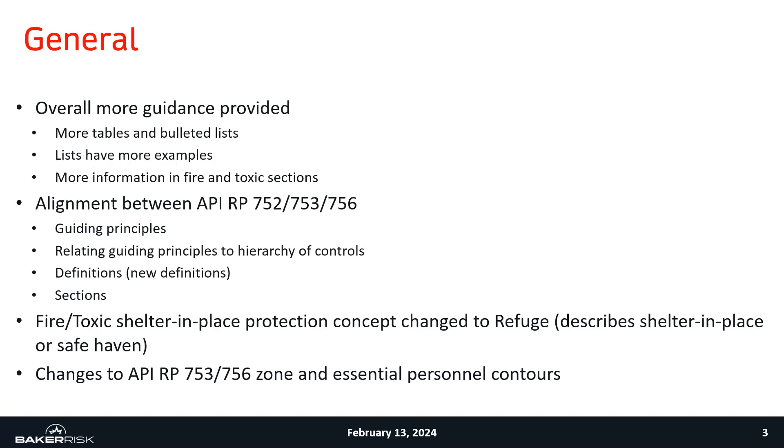API RP 752 covers new and existing permanent buildings, same as before. It also covers new and existing portable buildings, other than light wood trailers, intended for perpetual use in a specific fixed location. Previously, API RP 752 covered portable buildings specifically designed to resist significant blast loads and intended for permanent use in a fixed location.

This is a change and an expansion from just buildings designed to resist significant blast loads, intended for permanent use in a fixed location, to basically any portable building other than light wood trailers intended for perpetual use in a specific fixed location. API RP 753 covers all portable buildings intended to be movable and all light wood trailers.

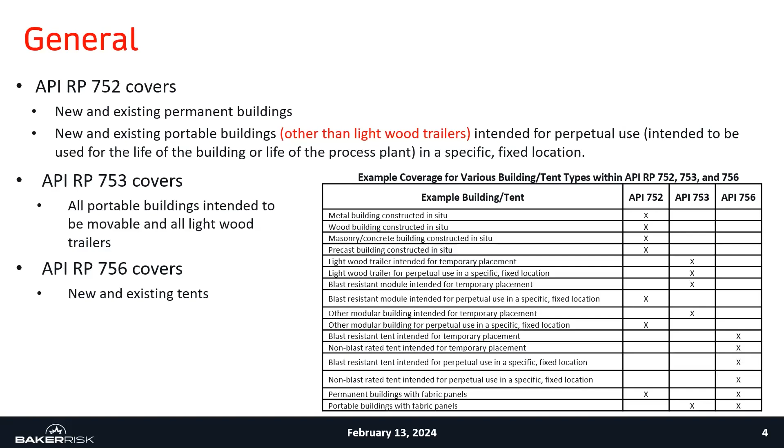Now looking at the determination of buildings and tents requiring siting evaluation section, the previous version of API RP 753 was released in 2007. At that time, guidance was provided on portable buildings intended for occupancy, portable buildings not intended for occupancy, and other occupied portable structures.

Subsequent versions of API RP 752 and 756 revised these categories into four main categories you see here: intended for occupancy, not intended for occupancy, excluded structures, and evaluated for exclusions. They also added more examples of buildings and tents under each of these categories.

This slide actually shows portable buildings that were not specifically listed in the previous version of API RP 753, but are now listed in alignment with API RP 752 and 756.

For buildings and tents that are excluded from the siting evaluation, the RP now states that owners and operators should consider the factors listed in the explosion, fire, and toxic additional consideration sections, which is somewhat new to the RPs. Some of them had additional consideration sections, but some did not.

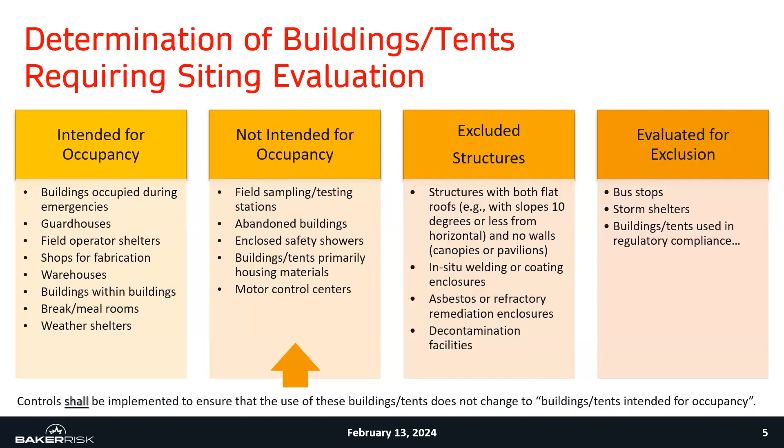Moving on to the siting evaluation process and criteria sections, there is an updated building site evaluation process flowchart in API RP 752, and the additions are shown in the shaded color here, which are really around ensuring that the buildings are placed in accordance with the guiding principles, documenting the siting evaluation, and revalidating the siting evaluation periodically.

Previously, the siting evaluation process criteria included things like blast load, thermal flux and exposure time, building damage, occupant vulnerability, etc. But instead of internal environment quality, shown here, this was previously called building internal environment degradation. And now there's additional description on what this actually means.

What does internal environment quality mean? It's things like oxygen, carbon monoxide, carbon dioxide levels, air temperature, humidity, temperature of building surfaces, and smoke and/or other combustion products. These criteria on internal environment quality are really important for buildings with a toxic or fire refuge protection concept. They're really not that important if the protection concept is for immediate evacuation.

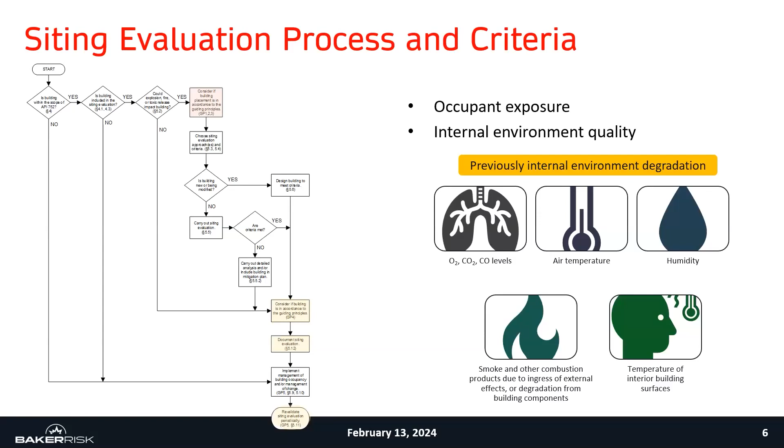And these criteria, and identical criteria, have now been added to API RP 753 and 756.

Moving on to the siting evaluation process, a little more detail in 753 and 756. There was not previously a flowchart present in API 753, but one was present in API RP 756, and it has been slightly updated. The flowcharts in API RP 753 and 756 are identical, except for the terminology of portable buildings and tents.

There are several new shall statements in the siting evaluation process section, which were not previously present in API RP 753. Owners and operators shall determine and document occupancy restrictions for each building intended for occupancy. Occupancy restrictions means whether the tent or portable building is limited to essential personnel only, or it can contain non-essential personnel. Then determine if the portable building or tent intended for occupancy could be impacted by an explosion, flammable vapor release, thermal radiation, or toxic material release. For each of these hazard types that could impact the building or tent, a siting evaluation of the hazard shall be conducted and documented.

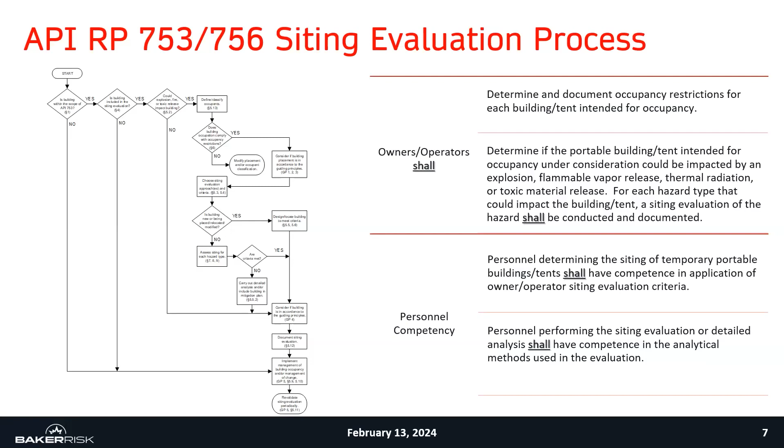According to their tolerance criteria. So a couple more points and changes around the siting evaluation process and criteria. One is that the siting evaluation method does not affect the determination of the occupancy restrictions or zoning restrictions. So whether you're performing a consequence or risk-based approach does not affect the essential, non-essential, or zone 1, 2, 3 boundaries.

Those are independent. Also, if performing a risk-based approach for a portable building intended for occupancy to establish the individual risk, the study shall assume the portable building or tent to be occupied at least 40 hours a week by an individual for the entire year, and no credit shall be taken for cases where the portable building or tent will not be used or located at the site for less than a year. That 40 hours a week requirement was previously present in API RP 753, but was not in API RP 756. So really this is focused on, for example, if you have a maximum individual risk tolerance criteria, that maximum exposure cannot be less than 40 hours a week for any portable building or tent. That's the minimum. You cannot credit that the portable building or tent will only be on site for, say, a month or a couple months of the year in your individual risk calculation.

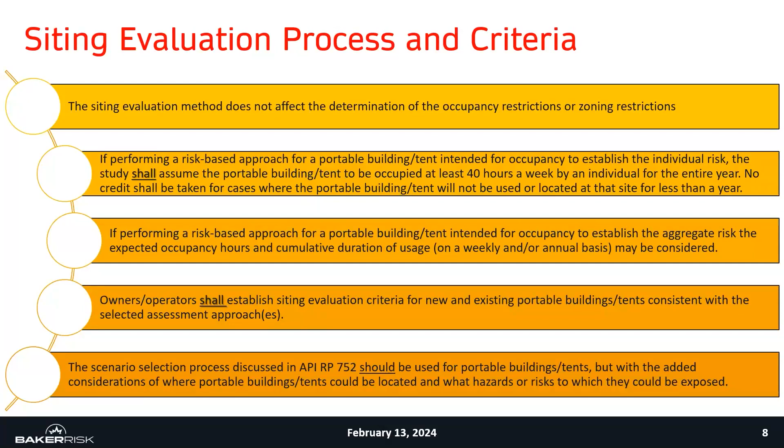Moving on to the MOC and revalidation sections. The MOC section was previously present in API RP 752 and 756, but was not in API RP 753. And in API RP 752, there is one update and two additional situations that may require an MOC evaluation. The first bullet here is about the update, which just the update is especially during periods of increased risk, including but not limited to unit startup, testing, or planned shutdown operations. So that addition there at the end is an update.

And then the new situations that have been added are the building status changes from temporary to permanent, which actually changes which RP the building is addressed in, and then adding an unoccupied building or structure that could cause a change in the potential for or severity of explosion, fire, or toxic material release impacts. That's focused on clarifying that unoccupied buildings or structures recognizes the fact that these may pose additional congestion and confinement on site or actually contain a hazard, even though they're unoccupied.

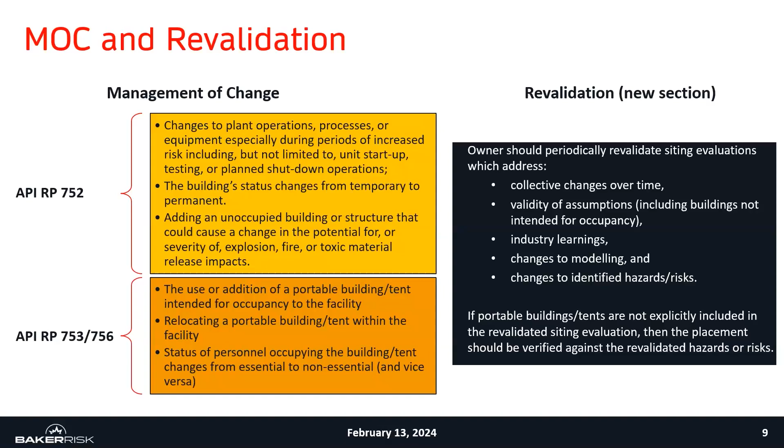Looking at changes to the essential and non-essential personnel sections of API RP 753 and 756. This is a new section on non-essential personnel and portable buildings or tents, and on siting restrictions for non-essential personnel. Now, API RP 753 did previously have a section on essential personnel and the use of portable buildings, but API RP 756 did not.

It states that owners and/or operators shall determine whether the personnel intended to occupy a portable building or tent meet the definition of essential personnel for each applicable phase of plant operation, such as normal operation, startup, and plant shutdown. It does also state that some personnel may be essential during one phase of operation and non-essential during another, and also that it's not dependent on whether the personnel work on site on a permanent or temporary basis. So again, just because you're essential for one phase of operation does not make you essential for every phase of operation. And if you're permanent, that does not mean you're essential necessarily. And whether you're temporary or there for a turnaround does not necessarily make you non-essential.

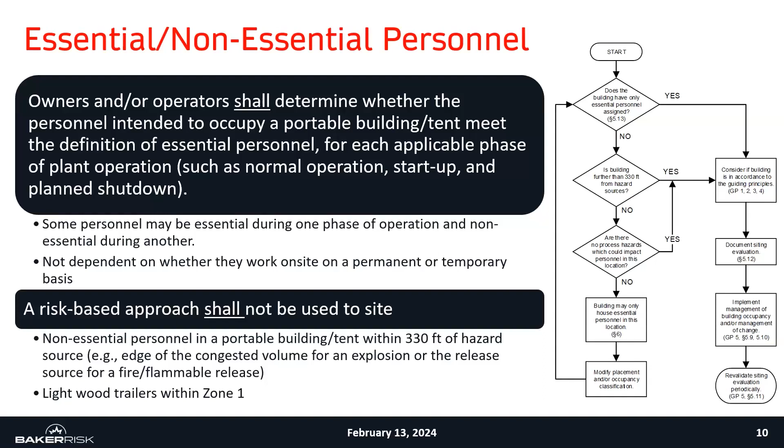There is also a new flowchart for occupancy restrictions in portable buildings and tents, shown here on the right. And there is also an explanation on why portable buildings and tents have a distinction in siting of essential versus non-essential personnel, and permanent buildings do not. That's an additional sentence or paragraph added to the RPs.

So a little more information on the essential and non-essential personnel sections.

It states that non-essential personnel shall not occupy portable buildings and tents within 330 feet of potential explosion or fire sources, which could impact personnel in a building or tent at that location, regardless of building and tent design, and located in Zone 1 for VCE. The previous RPs stated that non-essential personnel could not be located in Zone 1, so that's still the same requirement. The new requirement is that non-essential personnel cannot be located within 330 feet of an explosion or fire source that can impact personnel in a building.

For explosion sources, this would be things like bursting pressure vessels, TNT scenarios, furnace firebox scenarios, things of that nature.

This addition recognizes that standoff from external VCEs is not the only hazard that could impact personnel in portable buildings and tents, and considering other explosion hazards, as well as flash fire and jet and pool fires, is also important. It also means that the location of essential and non-essential personnel is not coupled solely to the explosion zone boundary. So this addition could change where essential and non-essential personnel can be located on your site.

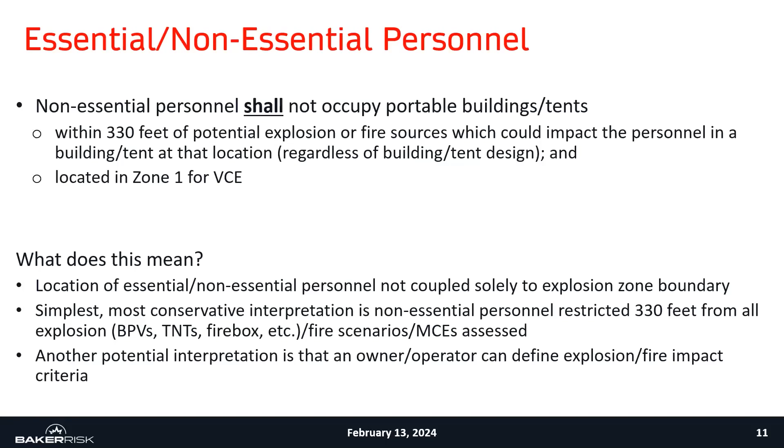Moving on to the explosion section, there is an updated siting evaluation for explosion process flowchart. Additions are shown in the shaded colors, pretty much the same type of additions as with the other flowcharts.

There is a previous section on factors influencing the potential for VCEs, and now it mentions that non-process congestion and confinement can also influence the severity of a VCE, providing examples including rail cars and vehicles, dense vegetation, spaces beneath elevated structures and substations, and buildings that allow ingress. So it's clearly recognized in the new RPs that non-process congestion and confinement can affect vapor cloud explosions and should be included in facility siting evaluations. API RP 753 and 756 specifically include non-process congestion and confinement in their definitions for zone boundaries as well.

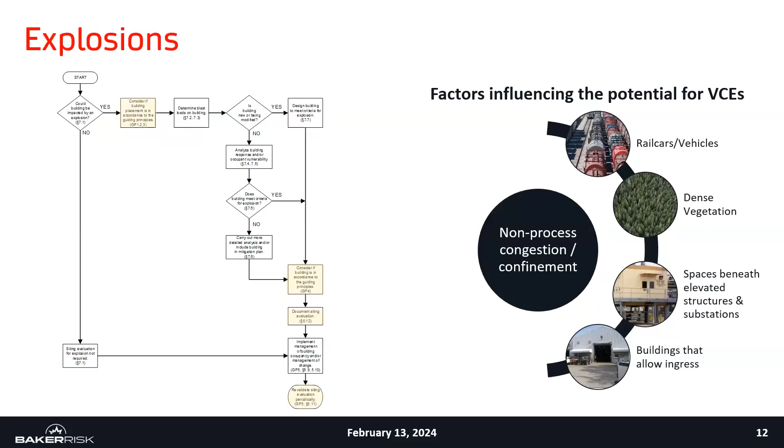In the explosion building assessment section, there are also a couple of changes. The previous version of API RP 752 mentioned types of debris hazards associated with explosion occupant vulnerability, and the revised version provides a bulleted list including 3 additional debris hazards shown in red here: thrown doors or windows, mechanical equipment, and fragments from shattered windows.

There's also a new section which allows explosion testing in lieu of, or in support of, detailed structural analysis to establish the response of a building or its components to blast loading. This was previously present in API RP 756 for tents, but was not previously shown in API RP 752 or 753.

There was also a previous paragraph in API RP 752 discussing buildings of brittle construction specifically. Now another section has been added on buildings constructed by the assembly of self-framing panels, stating that they could have inferior performance under blast loading compared to lightweight trailers, described in API RP 753. The evaluation of buildings constructed of self-framing panels is best based on static or dynamic testing, or detailed structural analysis of the specific panels and connections.

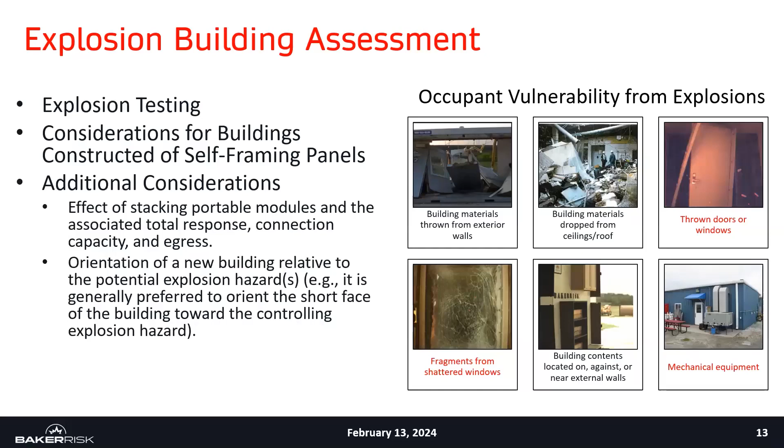So I've added a video here to give you a brief break from hearing me talk and to highlight a couple things. One, this is an example of building explosion testing, and two, it highlights potential vulnerability or lack of vulnerability from non-structural debris hazards, specifically around building contents located on, against, or near external walls in different structures and their associated building response level.

And these buildings are subject to the same blast load, of course, applied to the buildings, and all the structure and the internal equipment is the same. It's just kind of reversed, but it's the same connection, same internal equipment inside the buildings.

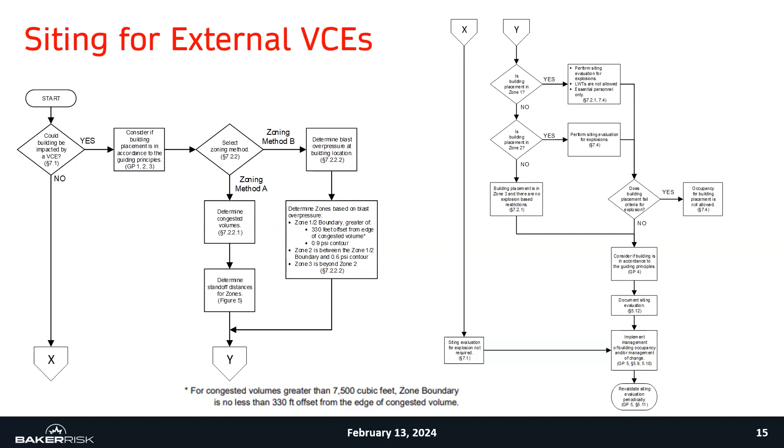To show a little more detail about these zoning methods, method A applies to external VCEs only, and it applies to congested volumes less than 1 million cubic feet. And the zone boundary figure shown at the bottom here is very much the same between the simplified method previously and method A; it has not really changed.

The main clarifications here are that method A limits the zone 1 boundary to a minimum of 330 feet, regardless of the size of the congested volume. That's why it says at the bottom there, 0 to 7,500 cubic feet. So again, minimum of 330 feet from congested volumes, and that's from both process and non-process area congested volumes.

The previous RPs did not specifically discuss non-process area congestion, so this is an addition. Potentially, if you could show that flammables can't reach some of this non-process area congestion, then that could be omitted from these zone boundary contours.

Another clarification is that method A cannot be used for congested volumes over 1 million cubic feet, which could have been previously inferred, but I don't think it was specified previously.

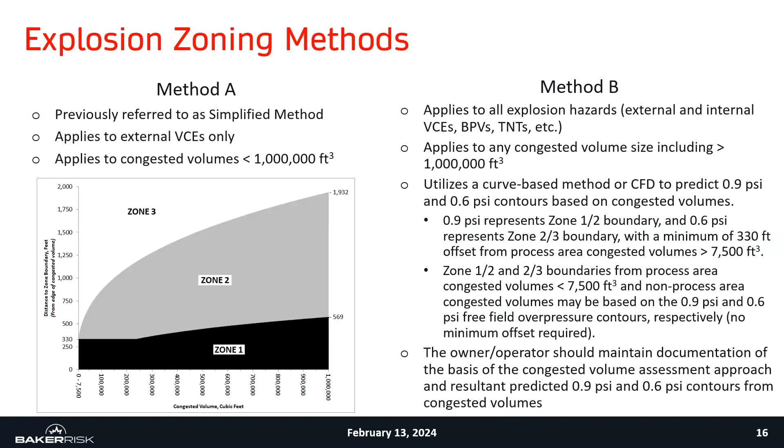Then zone 1-2 and zone 2-3 boundaries from process area congested volumes less than 7,500 cubic feet and non-process area congested volumes may be based on the 0.9 and 0.6 psi free field overpressure contours with no minimum offset. Owners and operators should still maintain documentation of the basis of the congested volume assessment approach and the predicted 0.9 and 0.6 psig contours.

Just a couple key points to cover here on these explosion zoning methods. One is what's important: the potential explosion hazards at your site, so whether you have external and internal VCEs, BPVs, and TNTs. If you just have external VCEs, you could use method A, but if you have some of these other hazards on site, you need to use method B.

Also, what are the maximum credible events at the site? Defining this is going to be somewhat important, as it could change how far your extents, say your 0.9 and 0.6 psig contours, go.

Whether congestion on site is process versus non-process area congestion matters, because process area congestion has that minimum 330 feet offset, whereas non-process area congestion does not, and you can use the 0.9 and 0.6 psig contours.

And then the size of the congested volume is also important. So less than 7,500 cubic feet, again, you can use the 0.9 and 0.6 psig contours. And over 1 million cubic feet, you need to use method B and not method A.

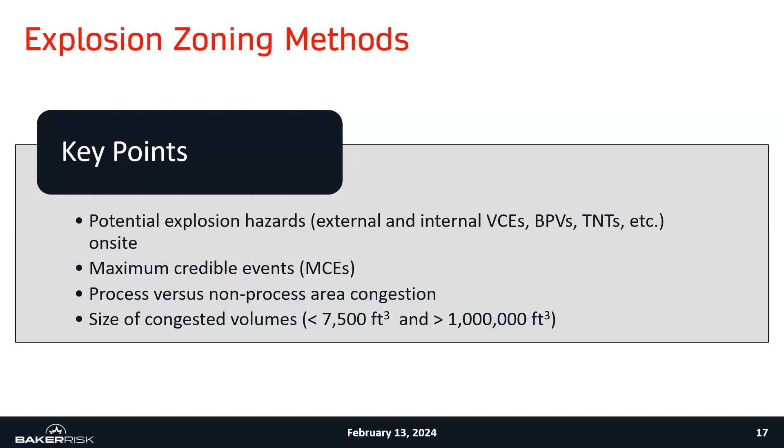So moving on to the fires section, there is an updated siting evaluation for fires process flow chart, with additions shown in the shaded color. The fire section still allows the spacing table approach, but includes some additional cautions around looking at the basis of those spacing tables and the purpose of the spacing tables. So just a couple more cautions.

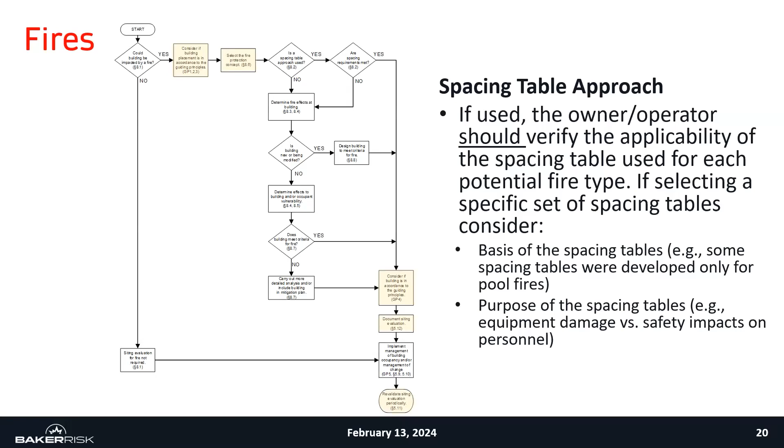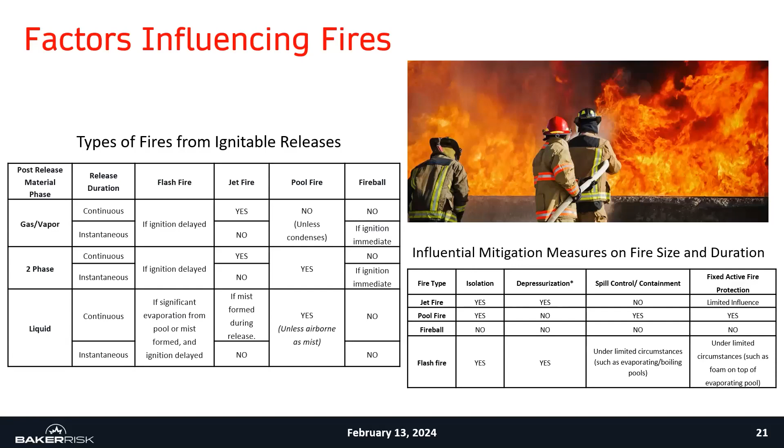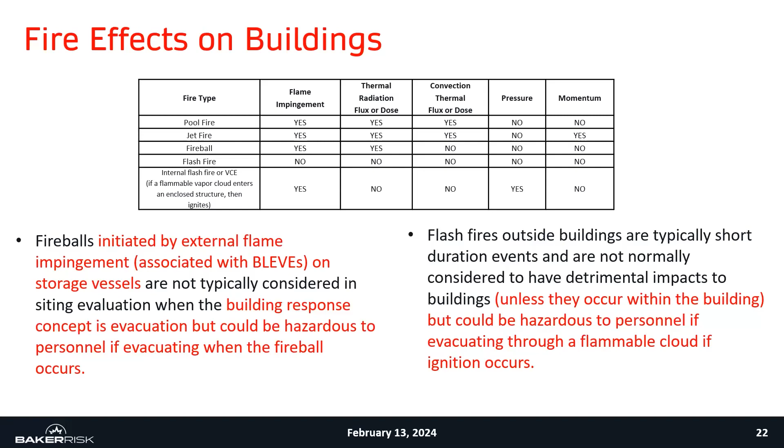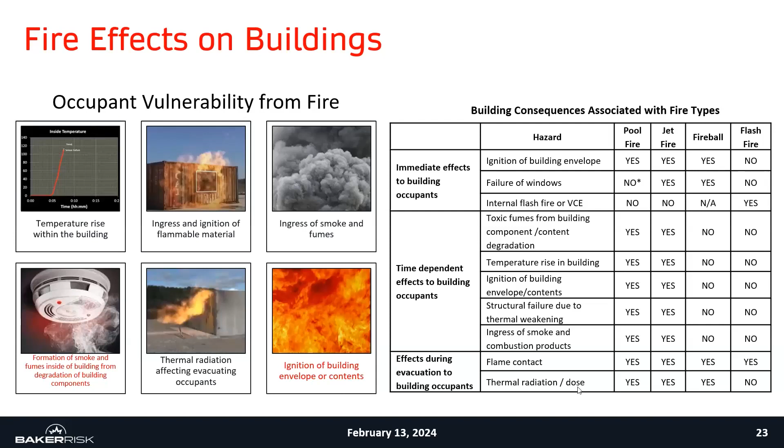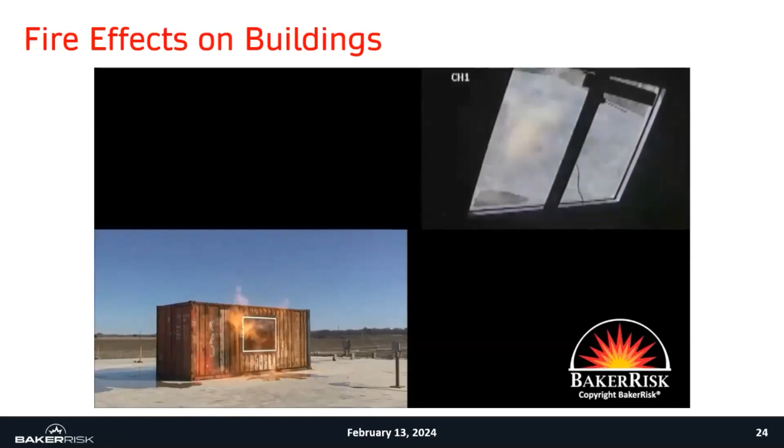In the next slide, I have added one other video break to highlight one of the immediate effects of jet fires to building occupants, which is the failure of windows. This just highlights that jet fires can break windows very quickly, an immediate effect for typical windows in a building.

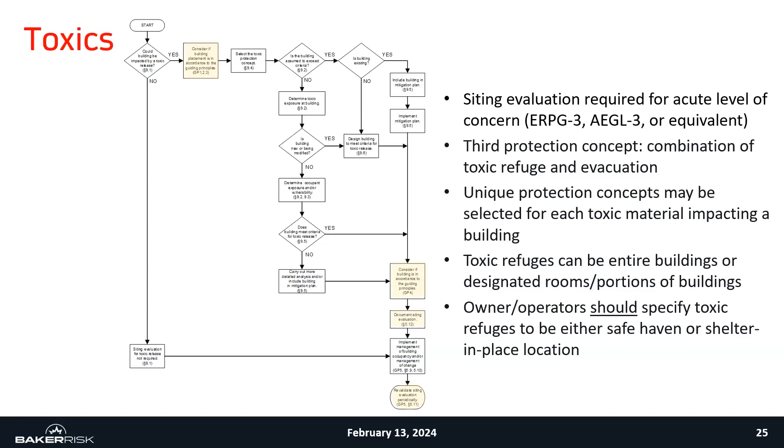Around the toxic and fire protection concepts, I'm going to cover them in parallel because of how closely aligned they are. But first, just a couple comments about the evacuation fire protection concept.

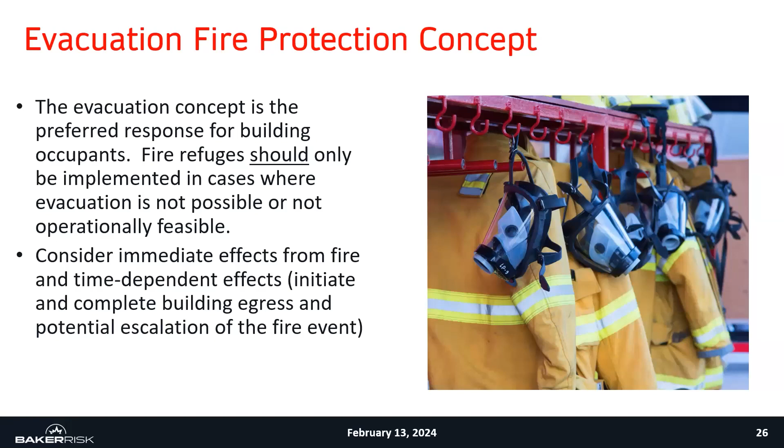This concept is now stated as the preferred response for building occupants, and fire refuges should only be implemented in cases where evacuation is not possible or not operationally feasible, considering immediate effects from fire and time-dependent effects. So when looking at delayed evacuation, either due to emergency response actions, site procedures, or building impairment, look at the time-dependent effects from the fire as well.

In the toxic protection concept for evacuation, there are two types, again immediate and delayed evacuation. The previous version of API RP 752 stated that owners and operators shall provide the following emergency response features, and now includes three more features in red: means for occupants to communicate with emergency responders, means for occupants to determine wind direction, and a plan to account for occupants. The PPE feature, which is also the mitigation measure, is slightly expanded and updated to be more comprehensive.

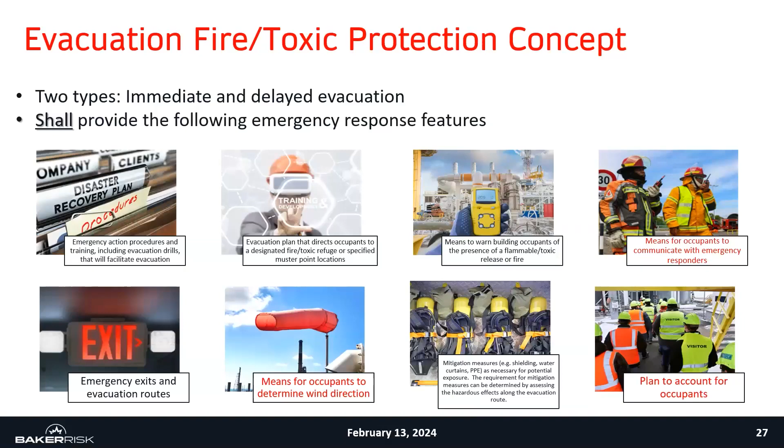The same features are listed for the evacuation protection concept for fires and toxics. The only real difference is the wording of fire and toxic, and for fires they also have shielding as a mitigation measure. A lot of owners and operators already include these additional items in their emergency response plan or strategy, so it may not have a major effect on different sites or companies, but if you don't, you should add these emergency response features to your evacuation protection concept.

For the fire and toxic refuge protection concept, previously API RP 752 stated that fire SIPs shall have features to prevent infiltration and formation of smoke or flammable mixtures inside a building, and actually directed you to the toxic SIP section. That requirement on preventing infiltration and formation of smoke is still there, but now owners and operators may specify a fire refuge to be either a safe haven or shelter-in-place location, and should consider providing the following items. All of these are technically new to the fire section because it previously just directed you to the toxic section.

Previously, API RP 752 in the toxic section listed 5 features that owners and operators should consider providing for toxic refuges. Now there are 3 additional items in that section, shown in red here: instructions for evaluating the atmosphere within the fire toxic refuge and actions to be taken if those limits or internal environment quality criteria are exceeded, sufficient volume of air to meet internal environment quality, and guidance for sheltering personnel to put the building into shelter mode. Again, it's basically the same list in fires and toxics here - really the same list.

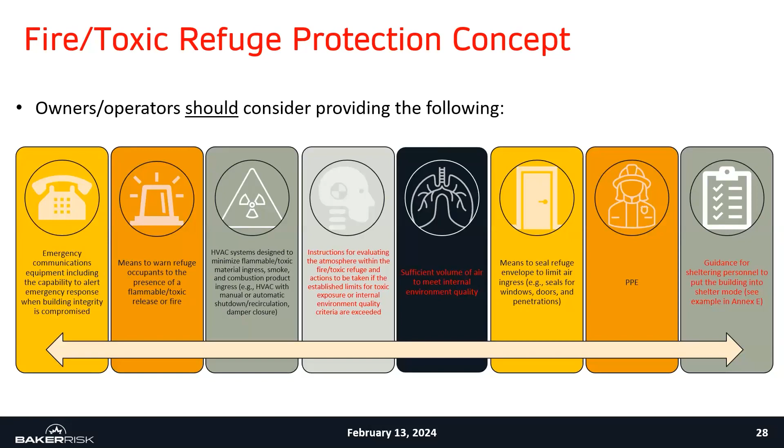There are also performance requirements in the fire refuge protection concept. Previously, it stated that performance requirements for these features shall be designed and assessed based on the length of time occupants are required to remain in the refuge and the length of time that the flammable material or fire impedes the refuge. Those requirements are still there, but now there are additional performance requirements that should be accounted for in the design of the fire refuge, listed here on the left. It also has additional should statements about assessing fire escalation potential and accounting for that in the design of the fire refuge or the emergency response plan in terms of evacuation, and considering potential for explosion damage on your fire refuge.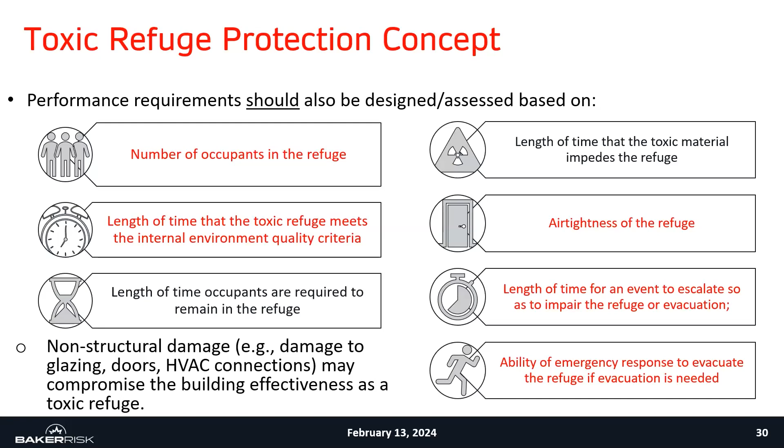There is a new section in API RP 752 on fire and toxic additional considerations, which provides a list of risk reduction measures that should be considered. I've shown that here - the red ones are for the fire section, the black or dark blue ones are the toxic, and the orange ones apply to both the fire and toxic sections.

There are also new shall statements. Owners and operators shall inform personnel occupying buildings and tents of the use, policies and procedures, and the plan in the event of an external fire or toxic release, and if other hazards in the vicinity could impact the building and tent occupants. Emergency plan details for the facility shall be posted in the building and tent, and where there's risk from an adjacent process plant area, the emergency alarm shall be audible within the building and tent. All of those are new shall statements really focused on emergency response planning.

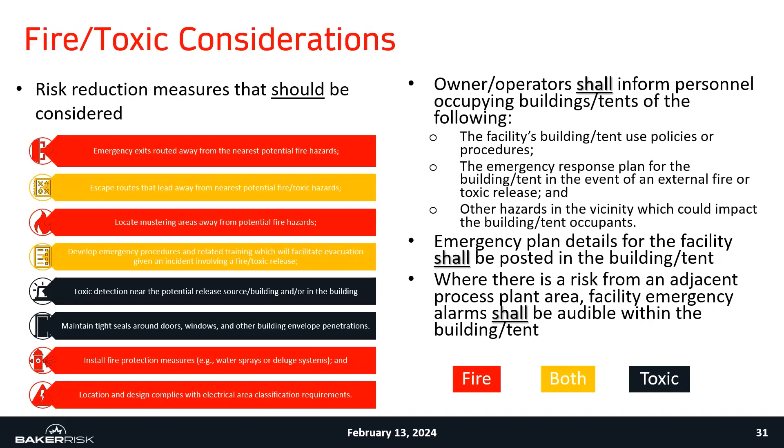There are additional considerations also in API RP 753 and 756. The explosion and fire additional considerations were previously present in API RP 753 and 756, but these items here are some of the additions to these sections. Again, you can look over those.

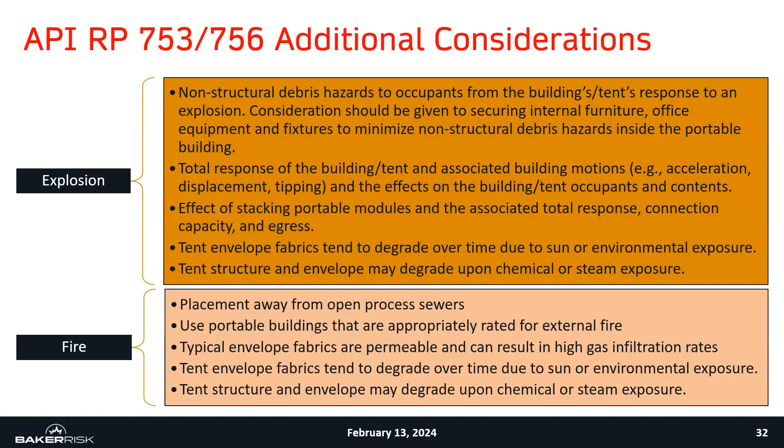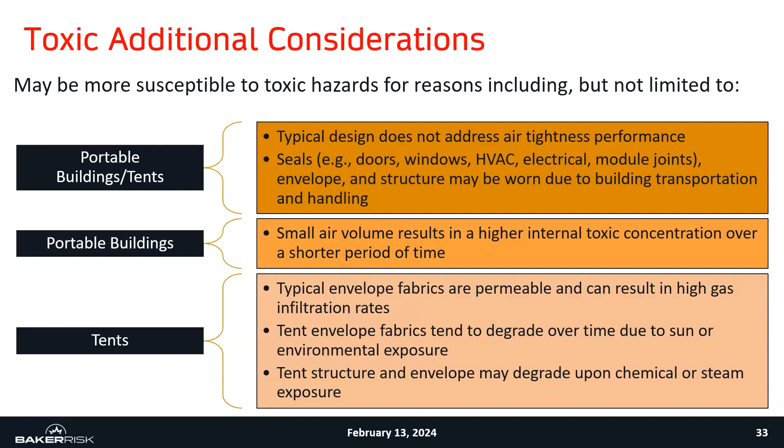In the toxic additional consideration sections, this was not present previously in API RP 753, and there were only 2 bullets in API RP 756. So this is much more comprehensive now, also showing and recognizing the difference in the design of portable buildings and tents versus permanent buildings - it highlights some of those differences in these additional considerations.

There are new API informative annexes in the RPs. These are the ones in 752. I'll highlight that there is one on typical building protection features for flammable and toxic refuge buildings.

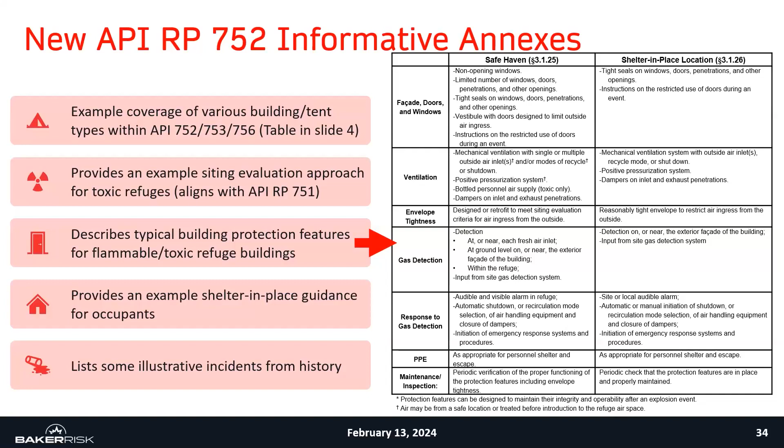So what's the difference between safe havens versus shelter-in-place locations? There are also new informative annexes in API RP 753 and 756. One highlight is examples of essential personnel, showing for different phases of operation which roles may be essential versus not essential, as an example.

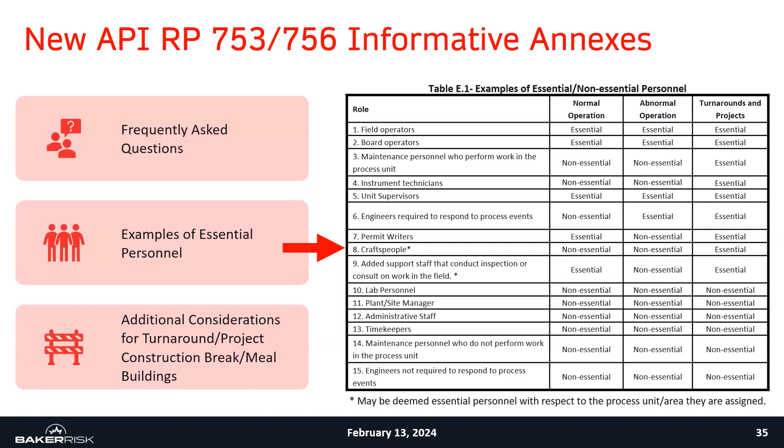So I know that was a lot of information. A couple takeaways or summaries: a lot of additional information, new definitions, new information in the bodies, and a lot of new great information in the annexes.

There's great alignment between 752, 753, and 756, so it's very easy to go back and forth between the RPs. There's also alignment with API RP 751 with the terminology of the toxic refuges and the safe havens versus shelter-in-place.

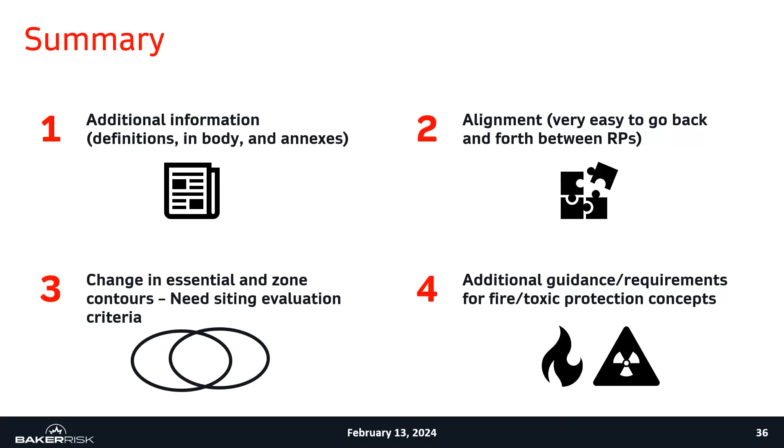Locations. There is a change in essential and zone contours, and you do need siting evaluation criteria for portable buildings and tents. And there is additional guidance and requirements for the fire and toxic protection concepts that wasn't there previously. With that, I know that was a lot of information, but I'll turn it over to questions.